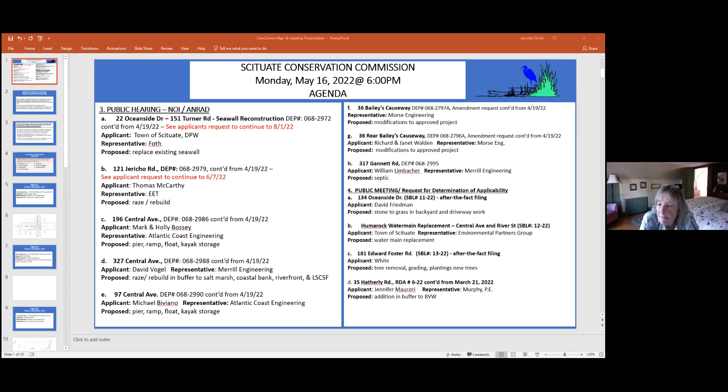121 Jericho Road, we have a request to continue. Make a motion to continue that to 6/6/22. 6/7? It says 6/6, but I'll go with 6/7. Mine says 6/7. Oh, I must have had an old one, I don't know. I'm just, where's the calendar? It's a Monday, it's June 6th. Oh, okay, all right, back to 6/6. You were right, Richard, first time today. Hey, listen, but you're right. I have the wrong thing up here.

So that was a motion from Richard, do we get a second? Second. All right, Andy, yes. Brendan, yes. Jen, yes. All right, well let's hold on now, because 6/7 is a Tuesday, so it is 6/6. Yes, that is, 6/6 is correct. Yep, okay, yep, thank you.

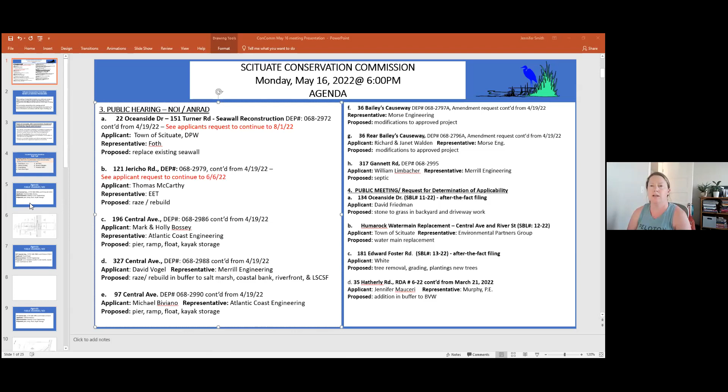All right, our third one on the list here, 196 Central. This is continued from 4/19, and so it was already opened. Yep, so I'm just going to unmute Jed Hannon from Atlantic Coast Engineering. Great. Good evening, commission members, can you hear me okay? Yes, Jed. Okay, Jed Hannon, registered engineer with Atlantic Coast Engineering.

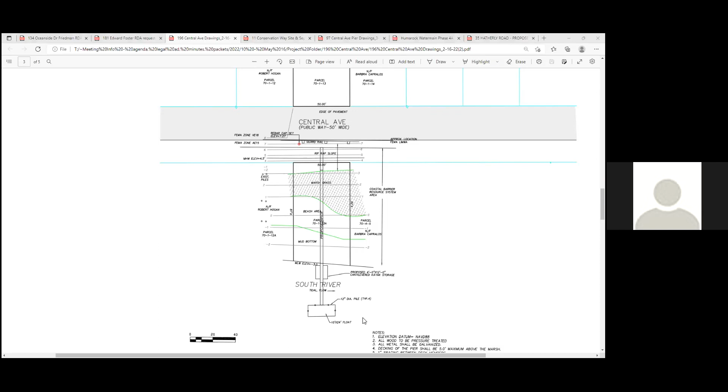As you mentioned, this is 196 Central Ave. It's for a proposed residential pier project. This project is along the South River. We can just scroll up to the locus map on the first page. Do you want me to share my screen? Yeah, if that's okay. No, sorry Jed, can't do that. Okay, can't do that. All right, so it's basically a pile-supported pier. If you could just go to the profile layout, please, that would be, I believe, on the next page.

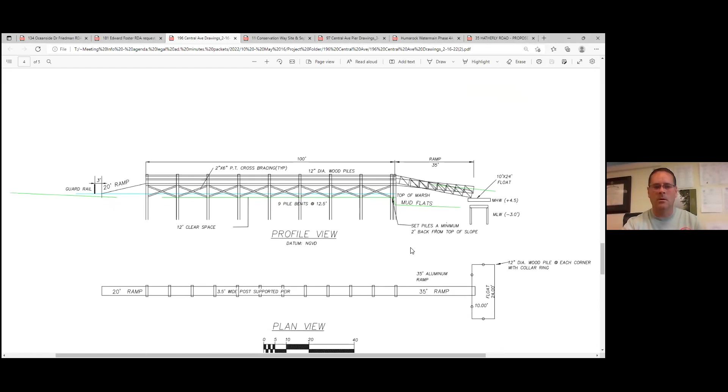Yes, there we go, great.

Brad Holmes prepared the environmental memo for this project as background. In terms of environmental checkboxes it falls under: land under the ocean, land containing shellfish, coastal beach, barrier beach, salt marsh, and land subject to coastal storm flowage. Brad did the wetlands delineation and the memo was prepared September 29th.

The proposed layout involves installation of 12-inch diameter piles for pretty much the entire length. Then we have a proposed gangway, a 35-foot ramp, and a proposed seasonal float, which is 10 by 24. There's also a 20-foot ramp at the Central Ave side.

The pier is designed in accordance with DEP requirements in terms of the length to width ratio and height. There's also, given the magnitude of the ebb and flow of the South River, piles proposed for the float just to give it more structural integrity, for lateral supports and such. There's proposed collar rings to keep the piles in place. The deck members are such that there's spacing in between them to meet the requirements of DEP coastal regulations and CZM in order to promote shellfish life and such.

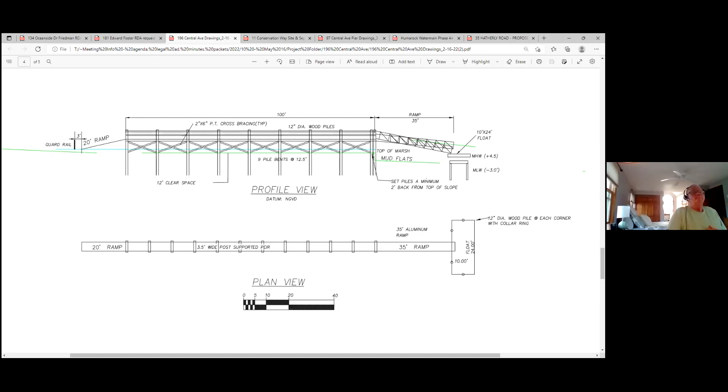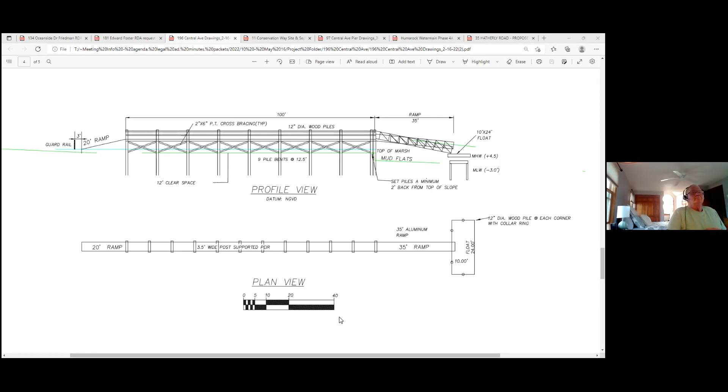Penny, what about you? No, Richard got my questions in. Thank you, Richard. Frank, what about you? He's got to unmute himself. There you are, great. So, no, I think Richard covered most of them.

I just wasn't clear, does that mean he's gonna try to store the float under their house on the other side of the street? That's what he was saying. That's what it sounds like. Yeah, he said he has kind of an enclosure, not a solid one, under the house where he keeps other things, which is what a lot of houses do. And it is higher there than on the riverside. It's not high by any means, but it is higher. That's right.

Sounds good. Okay, I think you missed Brendan. No, I got him. Oh, I'm sorry, my mistake, got him nice and early. What about you, Jennifer? I think the questions have been covered. I look forward to the chapter 91 response on the collar rings. With that, we might be good.

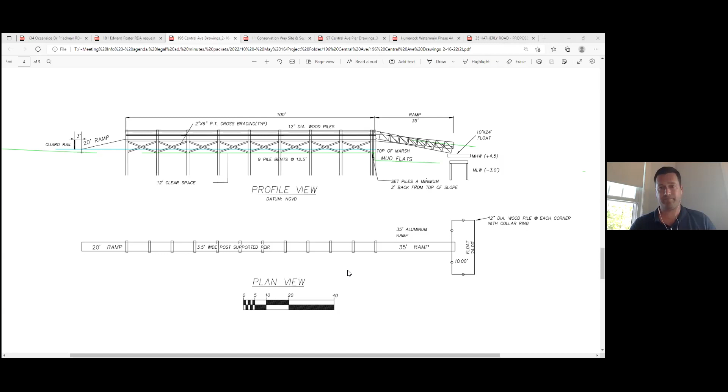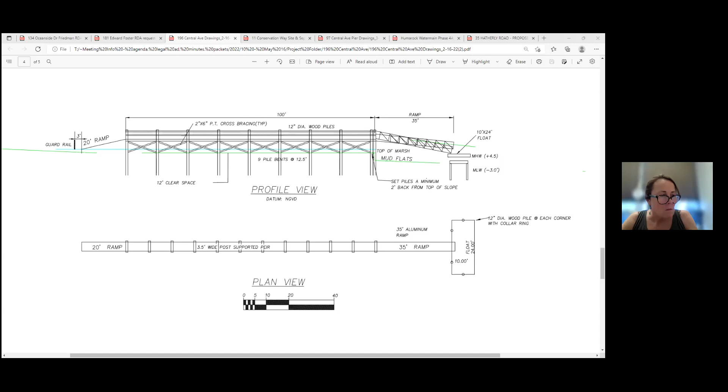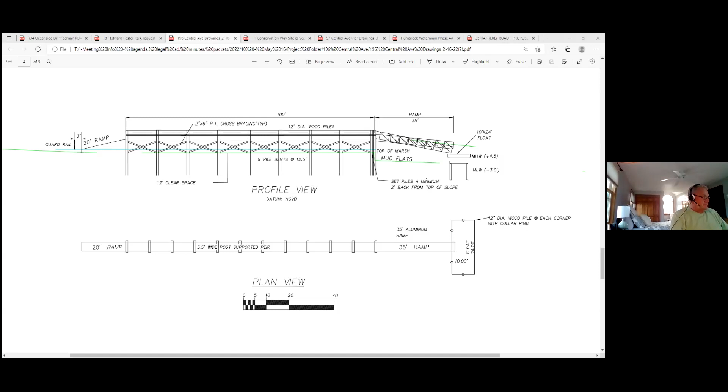So I was gonna say, maybe we should take 97 Central next, because Jed is here and he's on the call, we might as well just get it done. Okay, sounds good. Frank, it's your show now. Oh, I don't know if it's mine or not. I think we're doing pretty well. You're the end. So this was continued, 97 was continued from 4/19, so we have Jed again for that. Same thing. You want to... oh, we need the new plan. I'm sorry, 327 is Merrill, well, didn't you, yeah, just... you wanted, 97's Jed, 97. Yeah, there's another pier and it's Atlantic Coast. Yep, right, so that's what we're doing right now, right? Yes. Okay.

Good evening, Jed Annan with Atlantic Coast Engineering. Similar to the previous project, this is a proposed recreational residential pier project located at 97 Central Ave in Scituate. The environmental concerns that are part of the notice of intent on this one are coastal beach, tidal flat, lands containing shellfish, salt marsh, and land subject to coastal storm flowage. Brad Holmes prepared the environmental memo for us.

This particular project is a bit longer. It stretches over a significant amount of salt marsh. The proposed layout is sort of less invasive, with proposed 8x8 wood posts versus 12-inch diameter. The length of the pier, the pile supported portion, is 280 feet, along with a 30-foot removable ramp, and then a proposed 10 by 15-foot seasonal float. Both the ramp at the land side and the water side will also be seasonal and removed at the end of the boating season, as well as the seasonal float.

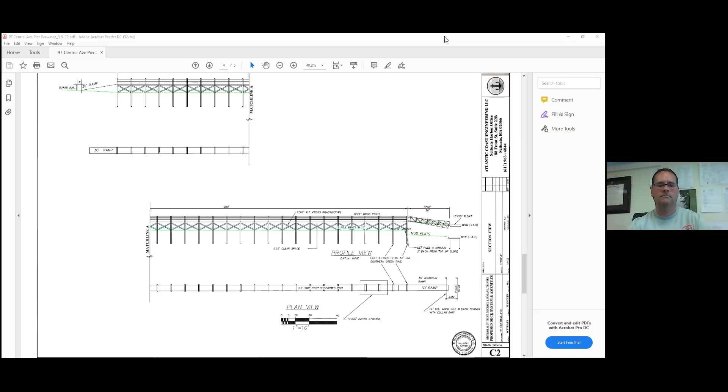Richard, you're in the hood. You wanna, or Amy, do you wanna add anything else to this?

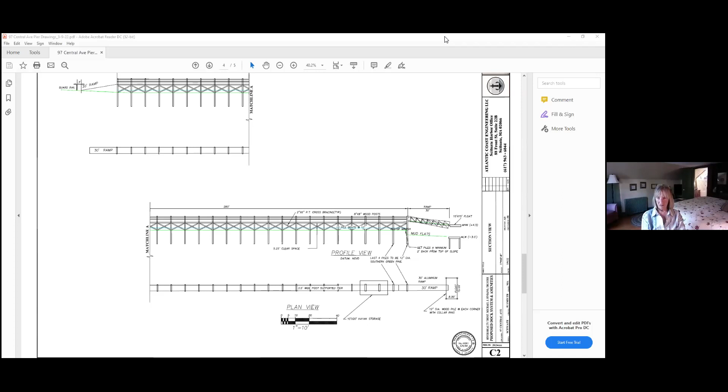Yeah, I just want to continue the discussion on why we have anchored floats proposed for both of these. Is the intention that they're going to take the ramp out for sure, but the float as well in the winter? Jed? Yes, float will come out in the winter. Okay, because neither of those can be stored on the beach or the marsh.

Understood. Yes, and DEP had similar comments, so did the harbor master. So I suppose we can just let the state run with this one.

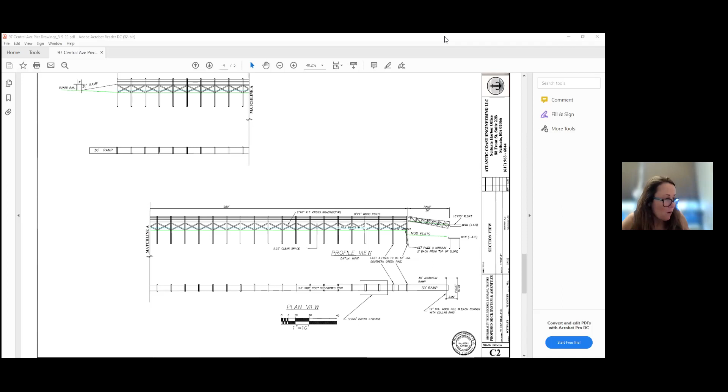Okay, Richard? Yeah, a few questions on this. Jed, this house runs at an angle on the river, so it actually has two facing walls. One that's looking out towards the mouth, and then one straight looking west with the river, which is the way most of them are. It is going on the west wall, correct?

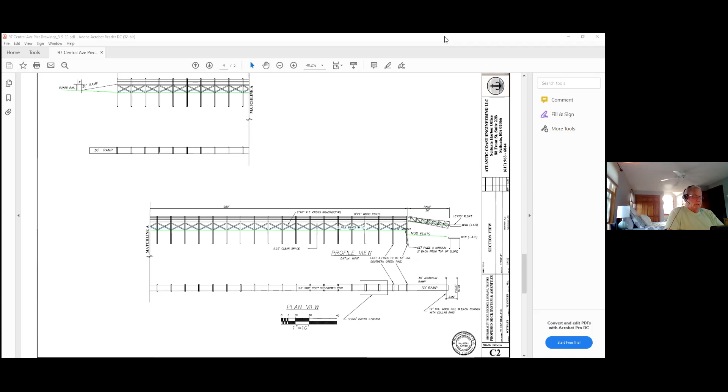That is correct. And yeah, it would be essential that they understand that nothing can be left in the flats. That area has historically been terrible when it comes to removing stuff. We've had issues all of this year and in previous years. And so it is being watched, and I would want them to know that, because there have been a number of floats, not theirs, but almost adjacent to them, where the ramps have been either semi-destroyed and stuff left in the marshes. And we're trying to get that area cleaned up, and they're right in the middle of it. Again, not theirs, but I think they've got to set the example that to date has not been well set.

Other than that, I did want to make sure of which location it was. I'm okay. Okay, thank you.

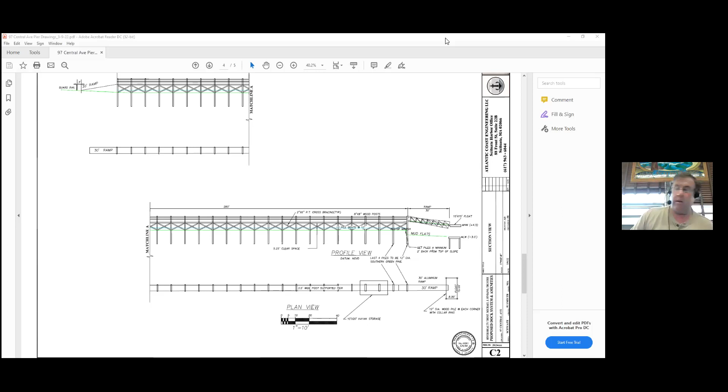Have a good night. Good night, you too. Yep, you too.

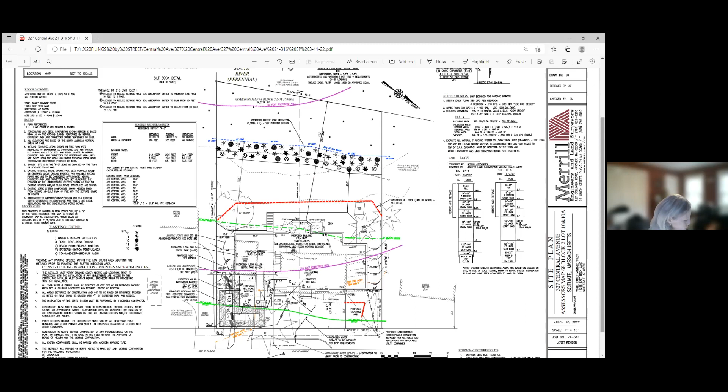That area consists of approximately 1,100 square feet, and the impact of the house and the deck in the 50-foot buffer zone is 503 square feet. So we are doubling the area for mitigation.

I do believe there was some discussion with regard to the architecturals. I don't know if we have those, if we want to show those, or whether we just want to start with the site itself.

I think the site, Deb, would be fine.

Great, thanks, Mike. I think that in general, the red line that you see on the plan is the erosion control line. Green are your 50-foot and 100-foot buffers from salt marsh, purple being your 200-foot and 100-foot riverfront areas.

We are trying to push the soil stockpile area up close to Central Ave. It's on that bottom right-hand corner as well. Grading on either side, dropping down to the backyard so that you have a higher elevation out front.

I believe the house first floor elevation is being raised to 19 in lieu of the floodplain elevation. I believe here is at 15. I think that covers everything at this point.

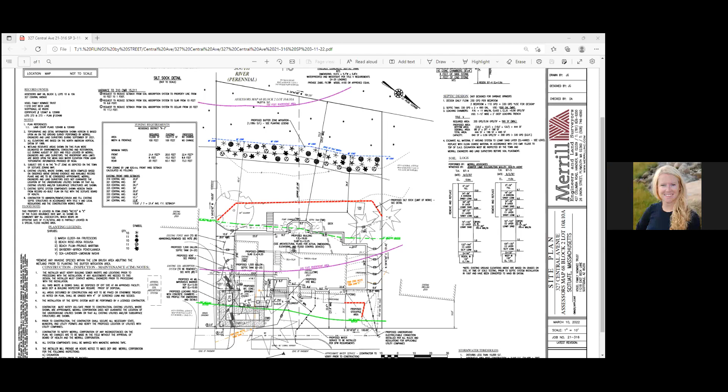So we would probably - and how wide is that buffer zone? Does that say 8 feet or something? So you see the salt marshes in blue, and we're proposing the mitigation buffer is an additional 11 feet coming off. 11 feet, okay, yeah, I just couldn't read that number. That would be area that would be enhanced, and lawn area that would be reduced.

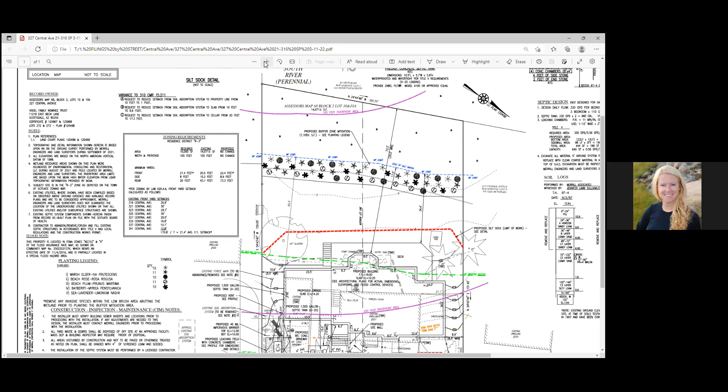And then you can also see the dimension from the salt marsh to the deck is 34.4 feet, that dimension is to the right there. But where that bump out is for the proposed home, you can see underneath it the two existing pump chamber and septic tank that are already within that area.

So I think we were looking at that as already disturbed area, and therefore, to see if there was an opportunity to utilize that for the home.

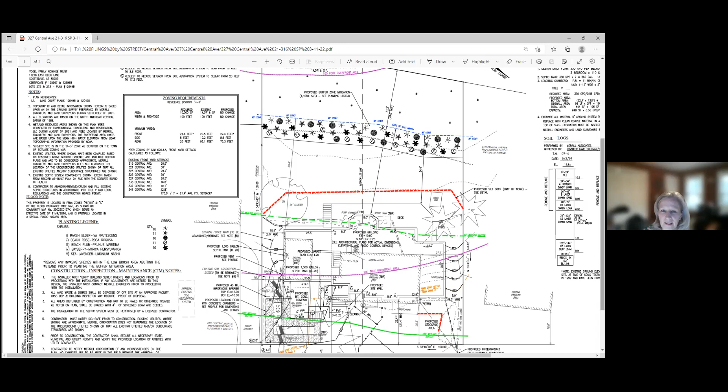Yeah, I understand that logic. I still don't love it, but I understand what you're getting at. I am good for now, Frank. Okay, Andy?

Yeah, I mean, if we're trying to maintain a 50-foot no touch, it seems like you could do most of this and get it out of the 50. That would be ideal, because I'm even hearing that it sounds like you want to take a tree down within the 50 because of the further encroachment of the house. So I think even the argument doesn't sit well that we're already cutting vegetation out of the buffer because of the house expansion. Those things would be nice, and if you could raise it up, that would be great. We've seen what happens when we have these narrow channels between houses with foundations, and what happens with the wave action. So those are my concerns.

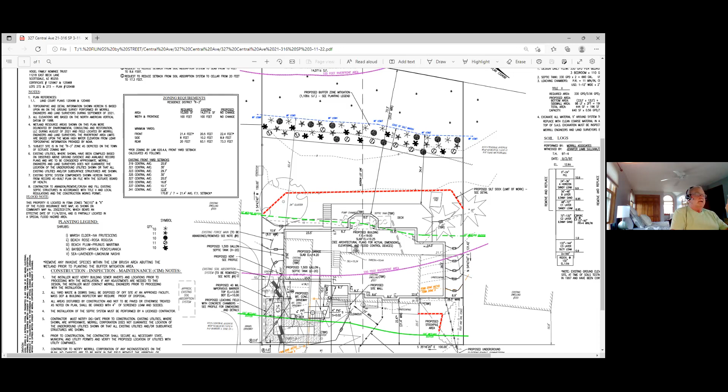It's really a very pretty area. The houses are close to each other, going down into a very wide area of marsh that's been expanding over the years. I'm not saying I have any particular objections to the house, but I think you need to see it before you say, oh, we couldn't do this and we should do that. It's a very interesting lot of land.

And I do know the area, and I know the house from visiting it, like I said, 10 years ago, and nothing has happened since that time. I just think you have to see this. It sort of reminds me, not that the river is nearly as violent as it was over on Third Cliff, that house we did where the neighbors were close, one was in front or to the side, and we were worried that it was going to get hurt by the tides. It sort of reminds me of that issue we saw on Third Cliff. I remember Andy was out there with us when we looked at that. I just would recommend we get a few people out to visit this. That's my comment for now.

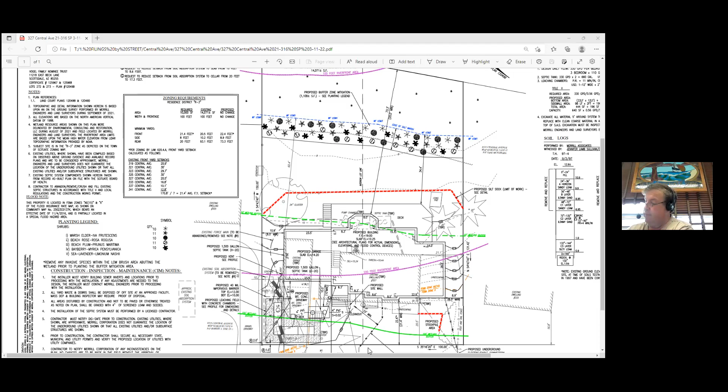Okay. There he is. Hi. Hi, good evening.

Hi, this is Lori Talani, and I live across the street at 332 Central. I'm not great at this, so I'm looking at the plan that's up, I don't have the new plan. Is it common that you would drive over a septic tank to get to a driveway?

It seems to me, if I'm reading this right, that the septic tank is going to be very close to the property line and then driving over it. To me, that seems like that could be not ideal. They designed a septic system to be under a driveway.

Is that just a different thing? It's called an H20 loading, so it's permitted pretty regularly.

And when would we have options to see the new plans, the architectural plans? We don't have them yet, so we can make them available as soon as we get them in. Okay, thank you.

We have someone else, Jane McNamara. Yes, can you hear me now? Yes, this is Jane McNamara, and I'm the abutter at 333 Central Ave, right next door.

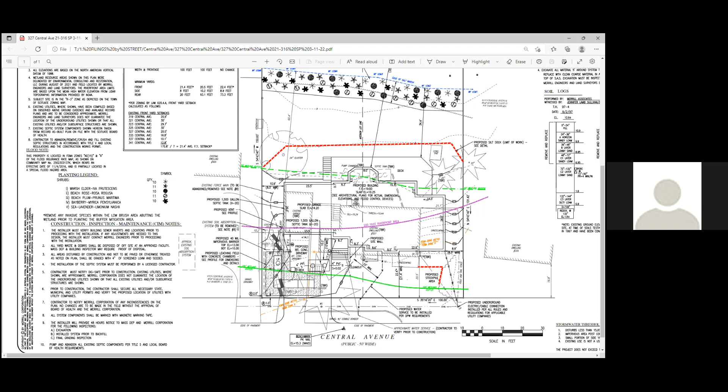So if you have another question? No, that was my main one, just because they've worked so well all these years, saving energy and all, I thought they may come under your meeting, but I guess not. Yeah, if you can double check with the building department, and when we have a set of architectural plans, we'll get them posted on our site.

But that's typically not our purview. We're looking at the type of foundation and then those resource areas. Okay. Anybody else?

No, so Amy, what are you recommending? Because we just got this revised plan, we're gonna have to continue this. So just so the folks on the meeting understand, we're not gonna be closing this tonight because we got a new plan and not all the information's posted, so we have to continue this hearing.

So perhaps you could check in if you want to get some more information. The hearing date would go to the 22nd of June, the next available hearing date. Can we get Bob's input out in an email to the commission and to the applicant? Yeah, he's got the revised plan and I just don't have comments back yet. All right, but as soon as we get that, we'll get it to our members and to Merrill.

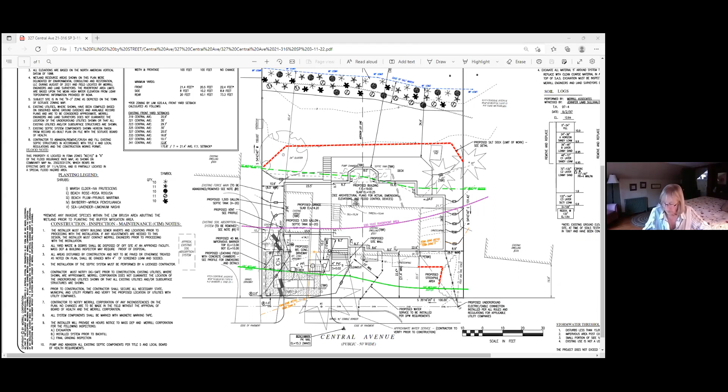You're gonna do both at once, Frank, 36 and 36 rear. I think we can blend them together. There's a little bit different things, but we might as well. So we're gonna hear both 36 and 36 rear. Do we have somebody from Morse Engineering? It looks like Greg's on the call, so I'm gonna unmute Greg Morse.

Good evening, Greg. So this was filed as a request for an amendment for both 36 and 36 rear Bailey's Causeway. If you're not familiar with the project, these are two projects that were permitted about two years ago. They were raise and reconstructs, each one being a single family dwelling. The project is substantially complete at this time. Both homes are up, 36 rear is occupied. The driveways are in, the septic systems are in. But we've requested an amendment essentially to address two items initially.

Those two items were in the order of conditions, condition number 49. Condition number 49 had to do with an earthen berm that exists at the site. This site abuts a salt marsh along Bailey's Causeway. And within that salt marsh, there was an earthen berm, which this applicant, the Waldens, had permitted back in the 80s. It was constructed and a certificate of compliance was issued for that in the 2000s. Condition 49 of your order requests that sections of that berm be removed and allow the lower portions of 36 and 36R Bailey's Causeway to flood. That is—

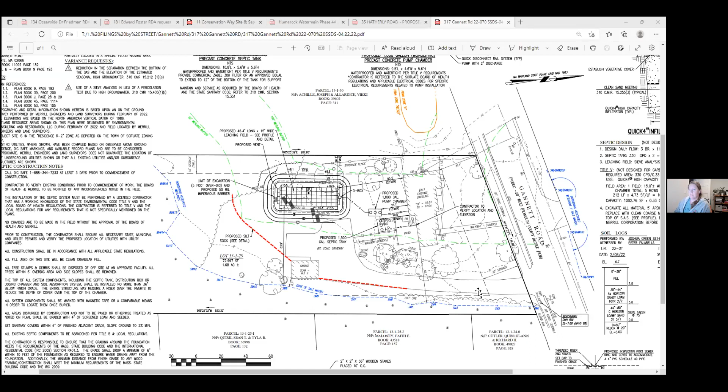Now the RDAs. So, my gosh, this is the first time I've actually opened one. All right, let me know what I do wrong, Penny.

We have 134 Oceanside. So on May 16th, 2022, at their 6 p.m. meeting at Town Hall, the Scituate Conservation Commission will act on the request of David Friedman for a determination of applicability of the Massachusetts Wetlands Protection Act and the Scituate Wetlands Bylaw for activities related to converting area of backyard to grass and after the fact work on driveway at dwelling at location 134 Oceanside Drive, Scituate, Mass. Abutters and other interested parties are invited to attend. Information to access meeting will be available on the agenda posted on town website.

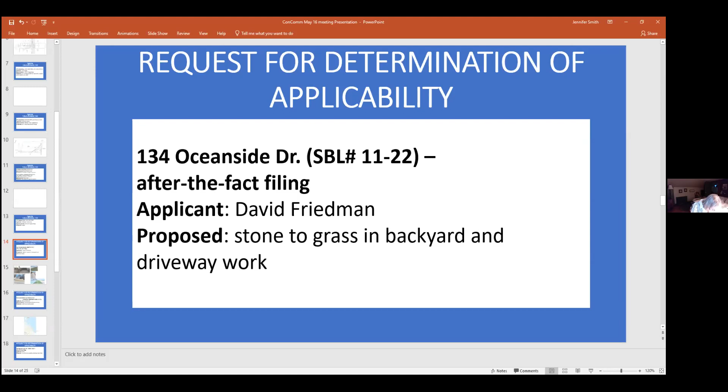Okay, so I unmuted Dave Friedman here. I think he's going to self-present and let us know a little bit about what happened. Can you guys hear me? Yes, we can. Great, so first, I didn't even know that I needed to apply for this, the request for determination of applicability.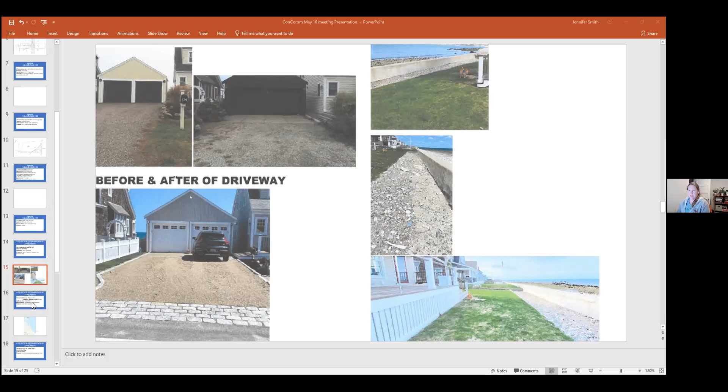What is the next one? Okay, water main. Water. Let me pull up my paper. Okay.

On May 16th, 2022, during their 6 p.m. meeting at Town Hall, the Scituate Conservation Commission will act on the request of the Town of Scituate for a determination of applicability of the Massachusetts Wetlands Protection Act and the Scituate Wetlands Bylaw for activities related to water main replacement along main roads, such as Central Avenue and River Street from Silver Road to Old Mouth Road at Humarock, Mass. Abutters and other interested parties are invited to attend. Information to access the meeting will be available on the agenda posted on the town website.

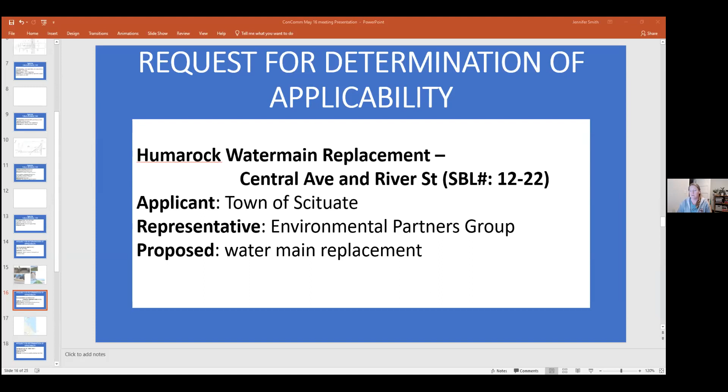Good evening. We have Sean McCarthy and a representative from Environmental Partners Group, Sabrina Castaneda. Good evening, Madam Vice Chair. Sean McCarthy with the Scituate DPW, and as stated, Sabrina is with me this evening as the project engineer from Environmental Partners.

Before you tonight is the replacement of all of the water mains in Humarock. To date, this has been our most challenging project, only due to the records, house placements, and gravel drives. The intent is to replace the water mains and provide new fire protection down some of the side streets where small 2-inch services are feeding multiple homes. The proposal is mostly in the roadway or traveled way, although there are a couple of areas where the main is tucked in behind a series of homes. We're trying to look at that now to really determine how their services are fed and how the best replacement will be for some of these, since there are areas where homes behind homes are serviced by a very small service. I'll turn it over to Sabrina, the project engineer, who can give you more details.

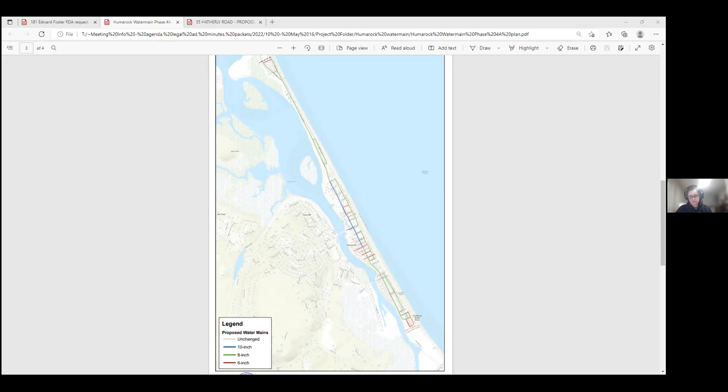All right, here we go.

On May 16th, 2022, during their 6 p.m. meeting at the town hall, the Scituate Conservation Commission will act on the request of Tim and Laura White for a determination of the applicability of the Massachusetts Wetlands Protection Act and the Scituate Wetlands Bylaw for activities related to the after-the-fact removing of fallen trees, regrading, resurfacing, and planting new trees at a dwelling at location 181 Edward Foster Road, Scituate, Mass. Abutters and other interested parties are invited to attend. Information to access the meeting will be available on the agenda posted on the town website.

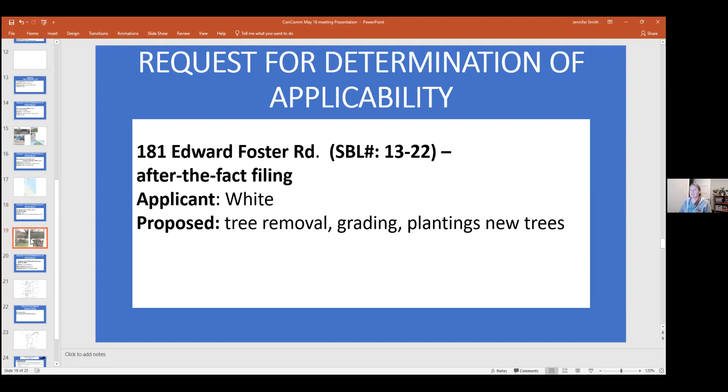All right, we have the property owner on the call here, Tim White. Good evening, Tim White, 181 Edward Foster Road. Hi Tim. Over the winter, we lost three large poplars, you can see them lying there on the right-hand side. One relatively new poplar that we planted maybe 4 or 5 years ago, and a flowering pear snapped off.

So on March 28th I emailed Amy letting her know that we had 3 down trees that we wanted to remove the week of April 4th. And while we were going to be there, we were going to have the arborist trim up the existing trees that were left. That work on our end got delayed due to the weather till approximately April 11th. Due to a volume of work, Amy wasn't able to get back to me until the 13th of April, and she at that time suggested we file a MAP, a minor activities permit, which we were fine with. But at that point in time, the work had already begun.

I had scheduled 2 loads of loam to come in to fill in where the stumps were removed—not removed where they had fallen, if you look to the lower left you can see how the whole trees came out of the ground—and to replace and regrade the tracks from the equipment that we had to bring in to get to the trees.

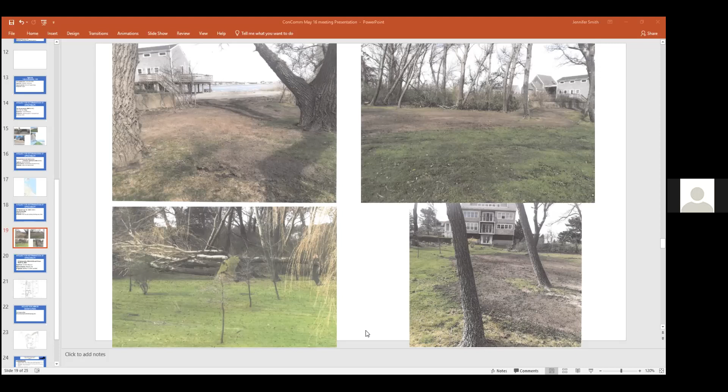Okay, thanks Tim. I'm not familiar with the front of the property. Amy, do you have any context on that?

Well, I did take a look at the property, and in the bottom right photo you can kind of see how the lawnscape is not level, it's not even topography out there. But what I saw, I didn't see anything that looked like it would divert storm flows. That's just my opinion. It's a big open area that's prone to flooding. This site has had orders in the past. Some of you are probably familiar with the property, it's right out the end of First Cliff. I think it meets the requirements of a negative finding.

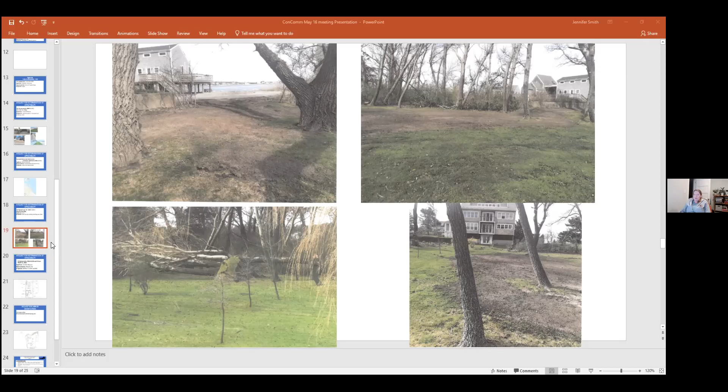What is next? 35 Hatherly. All right, 35 Hatherly, this is continued from March 21st. And Amy, do we have somebody for this one? You know, I had a feeling about this because we haven't received anything new.

But if you recall, on March 21st there was a lot going on, and you were leaning towards a notice of intent finding, but decided to keep it open in the event the applicant wanted to scale the project back, because what they were asking for probably wasn't going to be allowed. They could come back with a smaller plan, and that way wouldn't have to refile for the $100 or re-advertise. But we have not received or heard from them. So at this point, I'd say you could either close and find, since you don't need the applicant here, or you could give them another shot and continue to a date and time uncertain, which would take them off a future agenda.

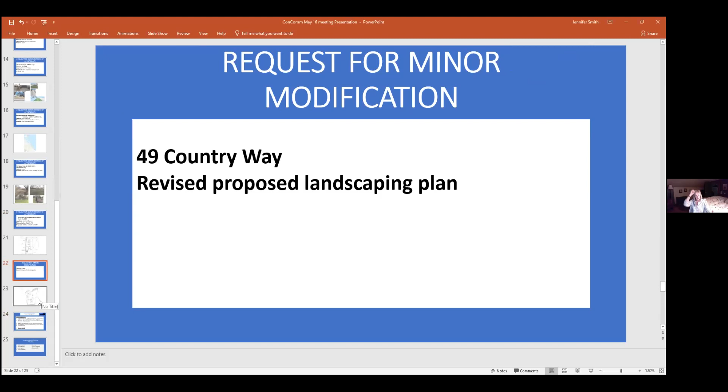But anyways, I think we should just table that and go to the request for minor modification, which is 49 Country Way. That's for just a little different landscaping plan. Yeah, it's a nicer one, with a little more thought into it. I don't see a reason why you can't make a motion to accept the minor modification for the updated landscaping plan. It's gorgeous. It's a better plan, really quite nice.

So can we make a motion to accept his modification? Do we have dates for accomplishing it? Those would be consistent with what's in the order. Okay, I'm good. Was that a motion, or do we vote on this? Yeah, we make a motion, please. Richard, second. Okay, now we vote. Andy, yes. Brendan,

Yes, is that your thinking pose? I caught it, I don't know why. I just wanted to see if I was paying attention. Just really quickly, I'm going to say yes for now on. No, I want the humor. Jen, it's too late for that. It's never too late. Jen, yes, I think this is gorgeous. I wish I could tour it. It's gonna be amazing.

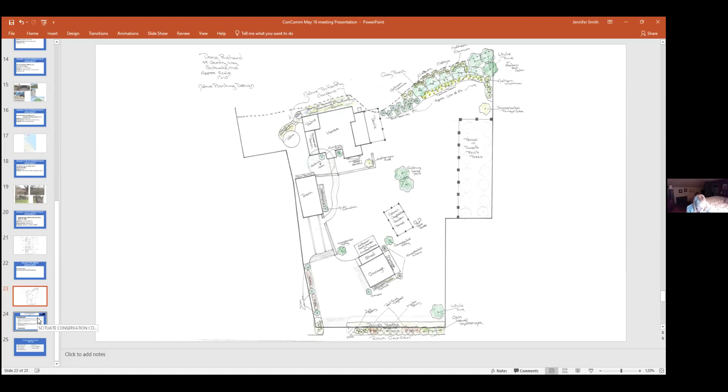Oh well, go down, he's a nice guy. Orders of condition, can we do those, Jen? You can do those all in one fell swoop. I make a motion we accept the orders of condition as written for 25 Mill Wharf Plaza, 210 Central Ave, and opposite 49 Rebecca Road.

Somebody want to second it, please? I'll second that. Oh, Brendan coming in hot. Andy, yes, and Richard, yes. Come sit in the lap. All right, Jake's doing good tonight. Oh my God, Jake's being a pill.